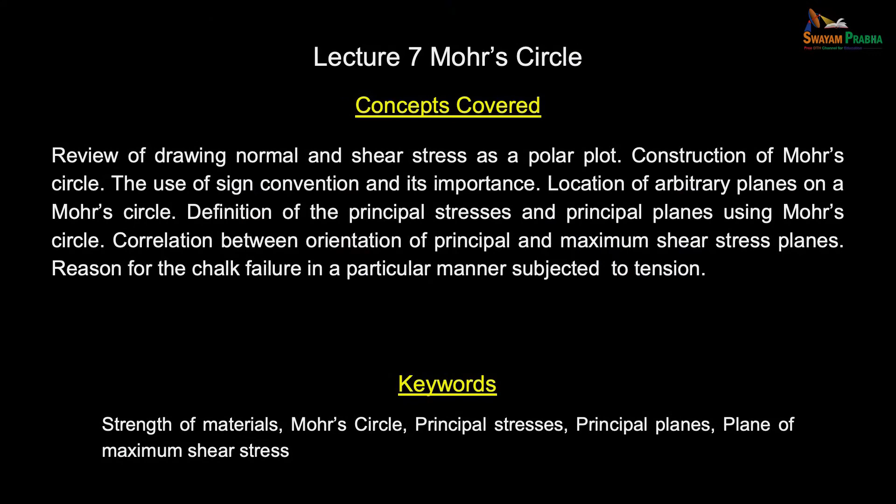We looked at stress in a simplistic manner as F by A. From there, we graduated to finding out what happens at a point of interest. We developed a new mathematical entity, the stress vector. Then we said we need stress vectors on all possible infinite planes passing through the point of interest, and we developed the concept of state of stress at a point. We looked at its pictorial representation, shown in 3 dimensions, then written for a planar situation, and then looked at its tensorial representation.

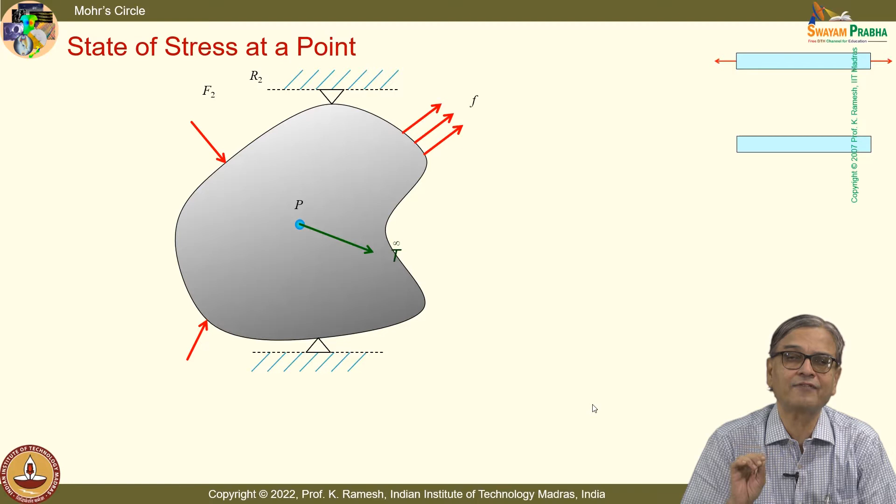I asked what are the possible ways of graphical representation. We saw one in the earlier class and will continue with that. When you say state of stress at a point, you show the stress vector like this - it is only a representation, I have not modified the size of the vector. Do not think every plane has a constant value; it is only a representation. Suppose I put all these points together, when I look at it I get an ellipsoid when viewed from the principal stress planes. We will postpone that for now. So the idea is there could be multiple graphical representations.

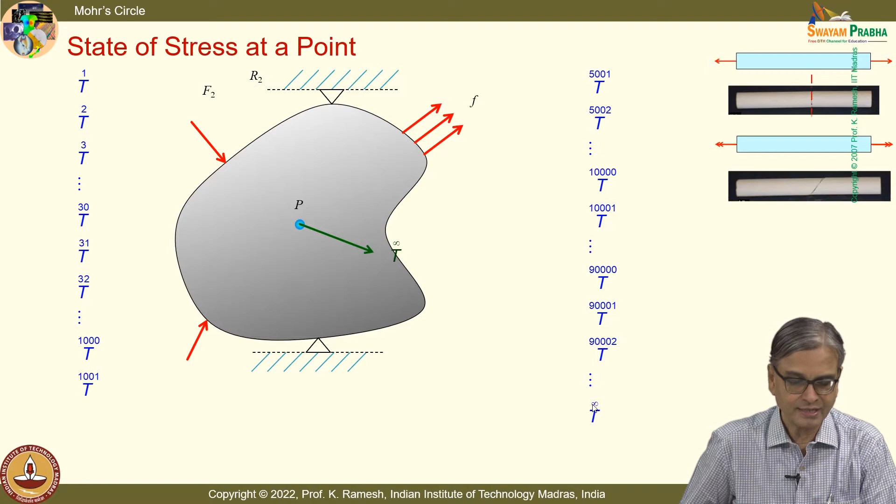We said that only if I have all the possible stress vectors passing through the point of interest do I get what is known as the state of stress at the point. And we also said this was looking unsurmountable, then Cauchy's formula rescued us.

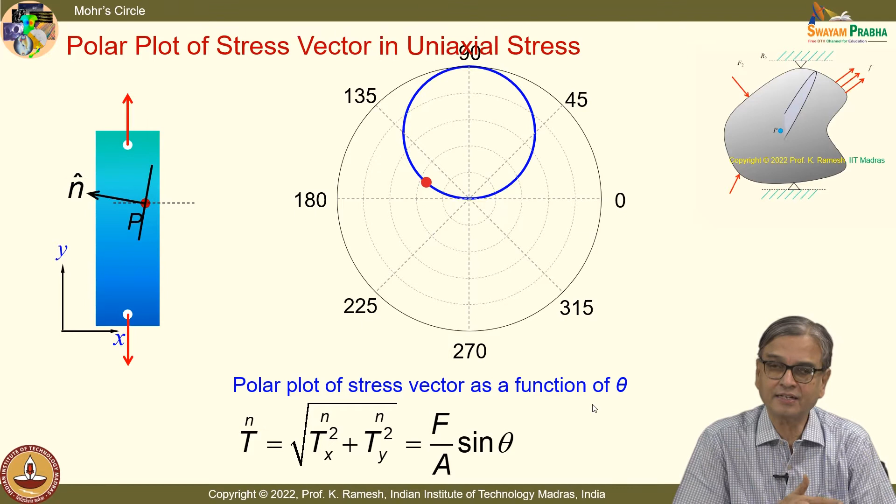You also have the stress vector represented as a polar plot. If a quantity is varying as a function of theta, the first step would be to plot it as a function of theta. That is natural, and if you look at any books, they do not spend time on this, but it is also very important. If you wanted to write a graphical representation, you would have started only like this.

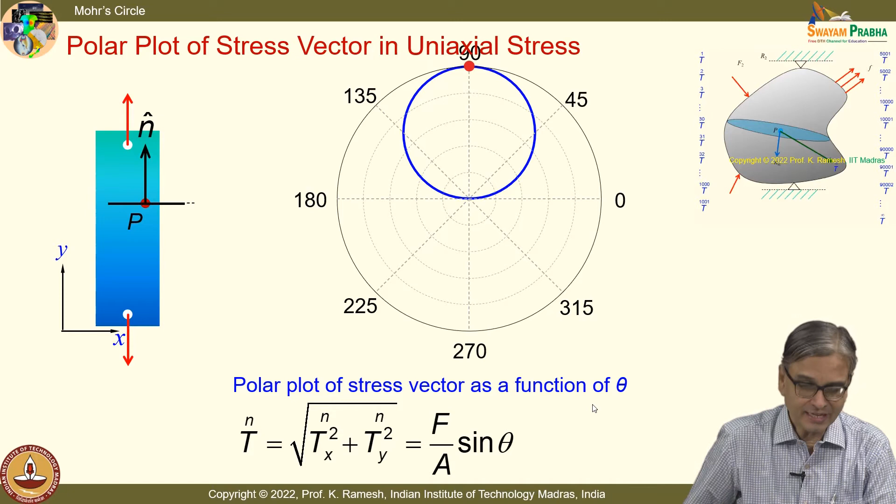Then we said the stress vector is not sufficient; we need to find out the normal and shear stress acting at the plane of interest. We have looked at that too. We have a stress vector that could be represented either as components along x, y, z directions, or components along the normal and tangential to the surface. In fact, while developing sigma xx, tau xy, tau xz, whatever shear stress is acting on the surface, we also resolved it into two additional components.

I suppose you understand that subtlety, because we have taken a plane passing through the x plane, so I could write the shear stress as components tau xy and tau xz. Here, when showing this, I am only showing on this plane what the shear stress is. So we felt that on each and every plane passing through the point of interest, it is desirable to know the normal stress as well as the shear stress, because this helps in predicting the failure theories.

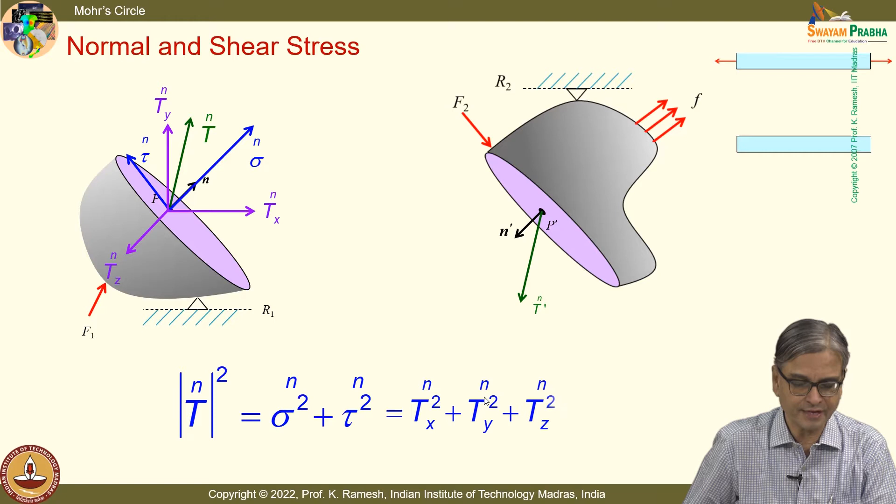So with this as a natural selection, we have looked at how this can be represented in these forms, and a natural selection is to go for a polar plot. I am also plotting this as a graphical representation, but as a function of load, plotting only one quantity. Photoelasticity also plots only one quantity, as a function of load, and you get this at every point in the model. This is one useful form of representation.

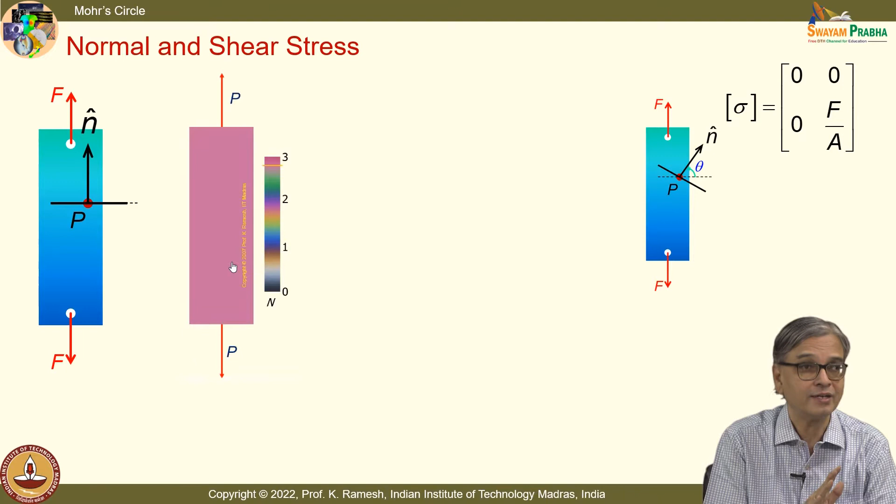At a given point, how do the normal stress and shear stress vary on each of the possible infinite planes? That is also important, so you have two different representations. This one is obtainable from an experiment, and it is useful because you know what happens in the neighborhood point - you get the advantage of a whole field of stress information. This is another representation of what happens at a point of interest.

For a given load, which we take as F, you get this as F by A. We discussed this too - F by A appears to be a scalar. All components, whether vectorial or tensorial, will appear only as numbers. I have said you should practice putting these as tensorial quantities. So in the case of simple uniaxial tension like this, you write the stress tensor in this fashion: 0, 0, 0, F by A. That practice you should also get - this is a tensorial quantity.

We have also plotted the shear stress, and it was looking very beautiful. I also made one more statement, and I don't know how many of you really appreciated it. We looked at the range of values of normal stress: it varies from 0 to F by A. And in the case of shear stress, it varies from 0 to F by 2A.

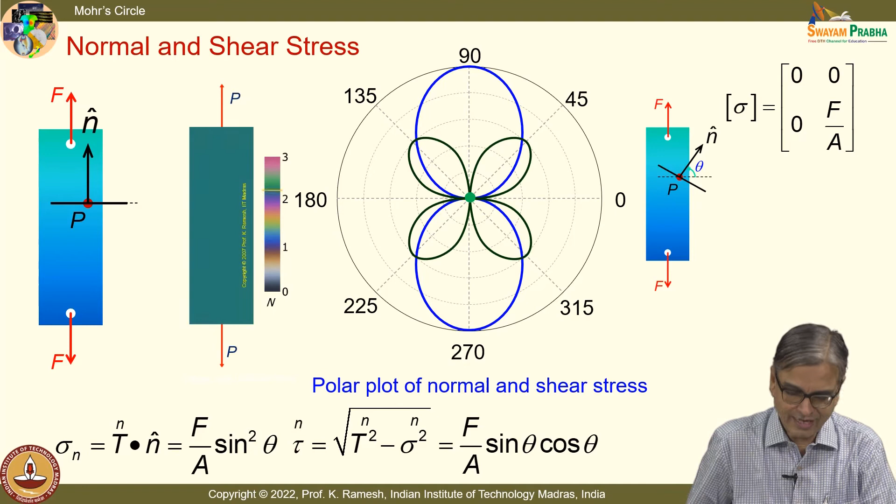Suppose this tensorial representation is populated, only the mathematics will tell you what kind of geometric pattern you are going to get. It may be very difficult to visualize and plot. Let us see what is the way that we would put it. And for this you will have to give credit to the scientists, since this has also taken sufficient time.

We had seen that in 1822, the stress tensor was identified by Cauchy. This form of representation - we want to know what is a normal stress and what is a shear stress. And I have already said, in engineering and science, what you plot on the x-axis and y-axis has really revolutionized the understanding of data.

When I go to this graphical representation, it also comes with an adjective that this is Mohr's circle. So even before you see what is the geometric pattern, you are going to get only a circle, and a circle is easy for you to draw. What I do is, on the x-axis I plot the normal stress, and on the y-axis I plot the shear stress.

This came about in 1882. It took about 60 years from the development of the stress tensor to this representation. What we are going to focus on in this lecture is the construction of it. If you want a mathematical proof, we will have to go back to the stress transformation, and we will do that in the next class. The Mohr circle representation is very elegant, and many of the concepts that you want to understand in stress analysis can be understood very easily by looking at the Mohr circle.

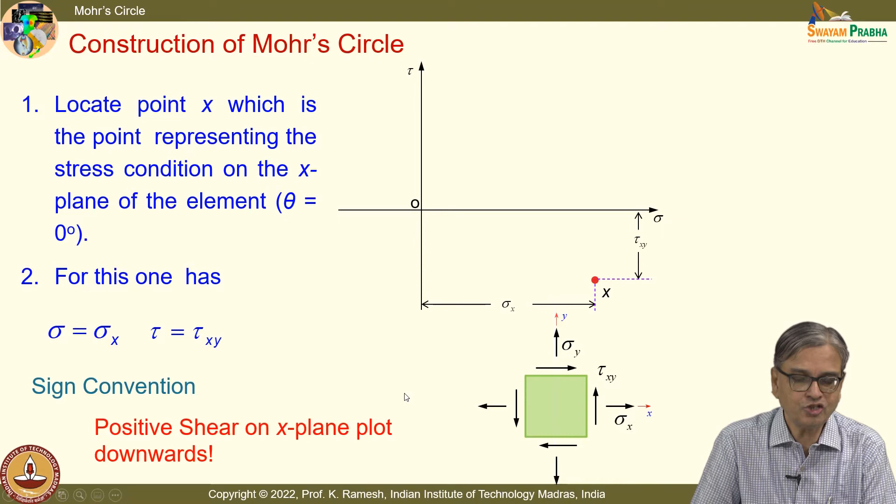From the pictorial representation, I have the information of what is sigma x and tau xy. I also have sigma y and tau xy. And what is the sign for sigma y and tau xy on the y plane? Both are positive. So the next job is to locate point y, and for point y we use the normal sign convention to plot.

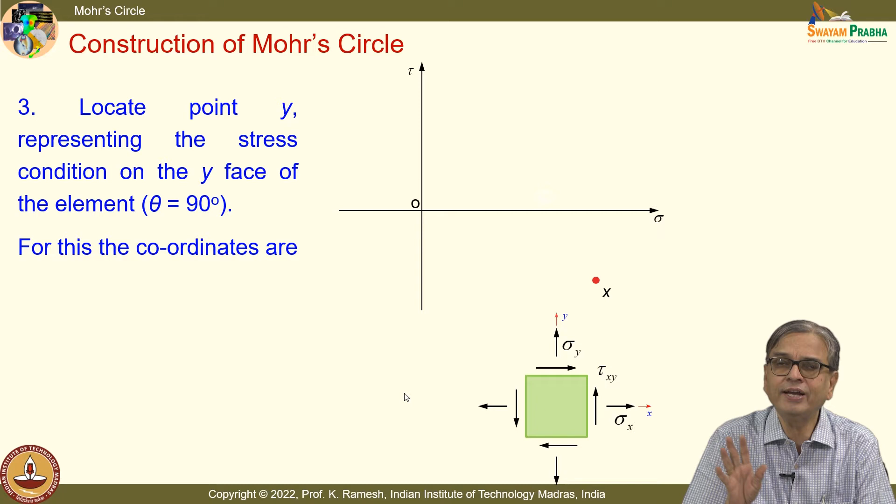I have the x axis, I have the y axis. I simply mark the point y. I have sigma equal to sigma y, so I have sigma y, and this is the line on which you can identify point y. Now I have tau xy, so this horizontal line meets and I get the point y.

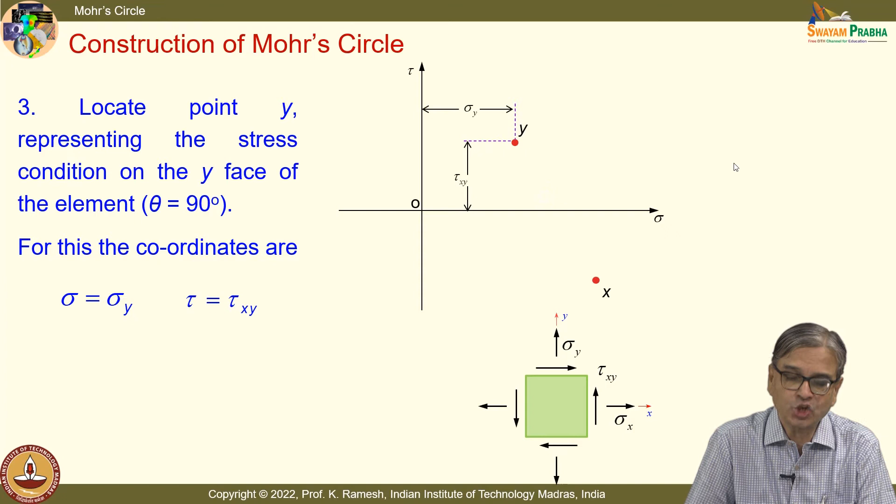And what you will have to know is that the points x and y are on a diameter that you do not know right now. So I join these two points to locate the center.

In those days you should appreciate they were not even having a calculator. Now you have a very powerful computer, and even the calculator does symbolic computations. All that has come. In the early 19th century they had only the slide rule, and most of the development was done being very comfortable in graphic representations. So the graphical representation has really helped the early development of science, in all disciplines. So you should give due credit for those graphical representations.

So now I have the center C, and I have already said that this forms a diameter. What strikes you directly? In a physical plane, x and y are separated by a certain angle, but in the Mohr circle, how are they represented? I have this angle doubled. Okay, so that is one observation, keep it in your mind.

Now I draw the circle with C as the center. You can also say what is the coordinate. One thing you can say is that, because it lies on this axis, the shear is 0. And what is the value of this? Suppose I have sigma x and sigma y, I can call this the average of that. We will see what the average is later. Keep it as sigma average and tau as 0. So we know the coordinates of C.

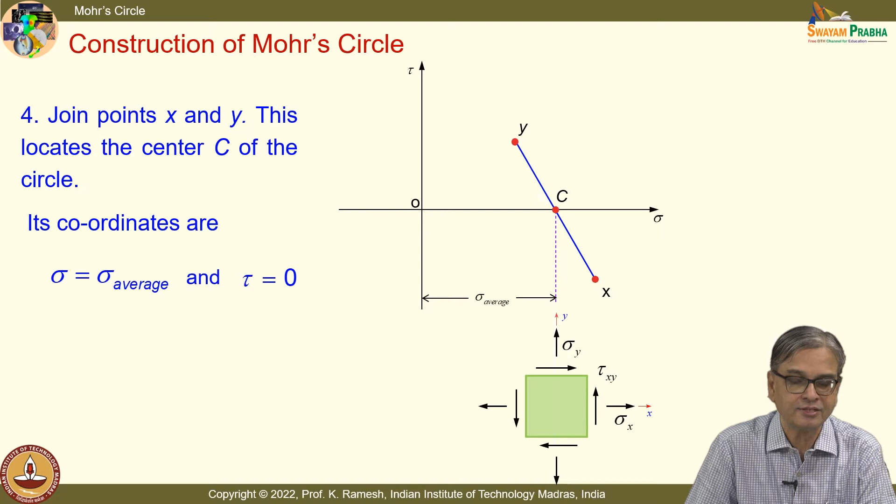I have taken up a generic problem. Do not confuse this with the polar plot we discussed for uniaxial stress. Does this circle belong to uniaxial stress? No. It is a generic problem because I have taken a generic state of stress: some sigma x, some tau xy, some sigma y. So both shear and normal stress exist. You learn for a generic case.

Later on, as an exercise, we can do it for a variety of cases. We have looked at uniaxial tension, we have looked at pure shear. Likewise, we can learn how these circles appear.

So what you have here, the graphical representation of the state of stress, that is what happens in infinite planes passing through the point of interest, is simply a circle no matter what the state of stress represented. The circle size may be different, the origin may be shifted, and the planes x and y may be relocated, but the geometric shape remains a circle. Don't you feel it is an advantage? It's a real breakthrough.

We will prove that it is a circle from a mathematical perspective. That we will see. Fine.

At this stage, we learn how to do the construction, because in the construction we follow a convention. Why do we follow a convention? That will become apparent when we see what happens in an arbitrary plane.

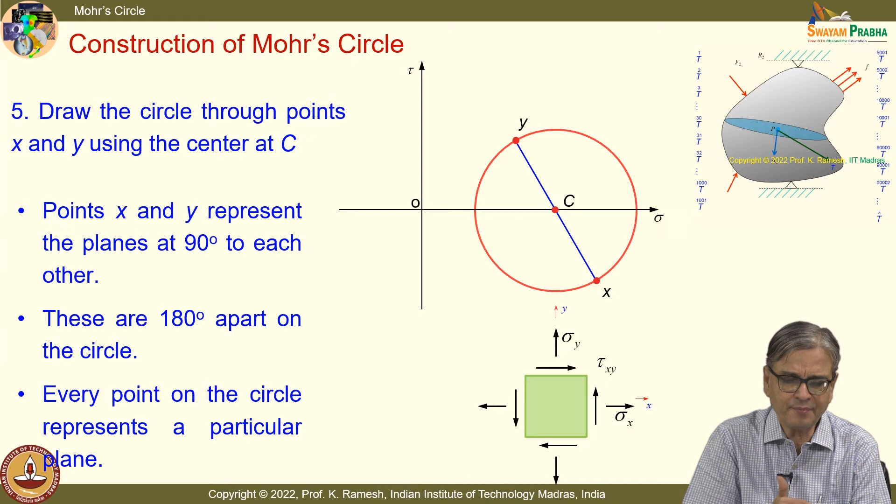And I go from x to y in the anticlockwise direction. I can go from x to y in the anticlockwise direction in the Mohr circle, provided I followed the convention. That will become apparent when we take an arbitrary plane.

We have done a stress transformation law from vectorial transformation to tensorial transformation. You have those expressions.

Now what we are going to do is, from the Mohr circle, we will find out if I have a plane oriented at angle theta from the x-axis, how will I get it?

I have to locate the point on this Mohr circle appropriately. Because once I have located the point, the magnitude of normal and shear stress are immediately known. They are nothing but the coordinates of that point.

So I have the stress tensor given, and then I want to find out what happens at a plane theta, and we have labeled that axis as x prime and y prime. In the earlier case also we had labeled it as x prime, y prime. What we determined was, we determined t x prime, you have to interpret that as sigma x prime x prime. So I was cautioning you, it is not like a vectorial transformation, it is slightly more than that because you have two subscripts.

Now the x prime plane is separated by angle theta. How do I locate the plane in the Mohr circle? From whatever discussion we have had, can you say how do I do it, because I know where the location of the x plane on the Mohr circle is. Now I have to locate the x prime plane. How do I do it?

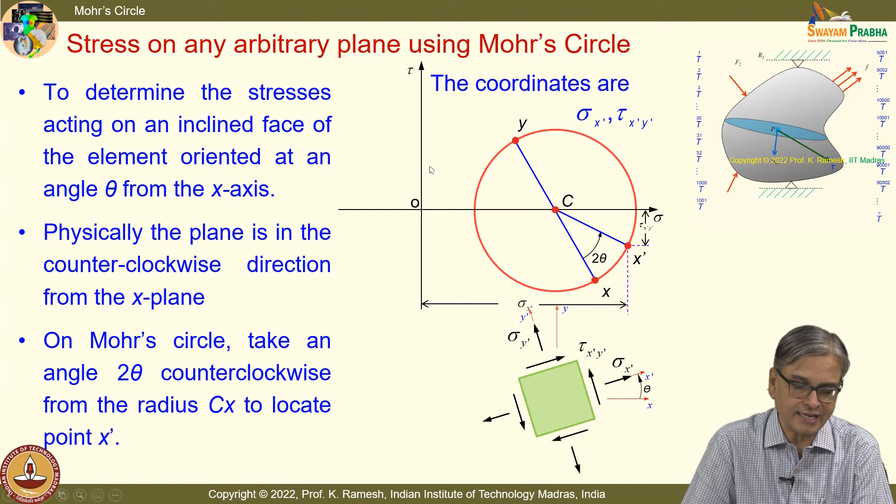So the coordinates are sigma x prime and tau x prime y prime. I have already said we will interchangeably call it sigma x prime, because when you put the symbol sigma, it is understood to be normal stress. So it's automatically understood, and we take the liberty to call it like that.

How do I locate the y prime plane? We have already seen that x and y are separated by 180 degrees. On similar fashion, x prime and y prime are separated by 180 degrees. I simply extend the radius to the diameter, so I locate the point y prime, and I can read what is sigma y prime and tau x prime y prime from this diagram. It is as simple as that.

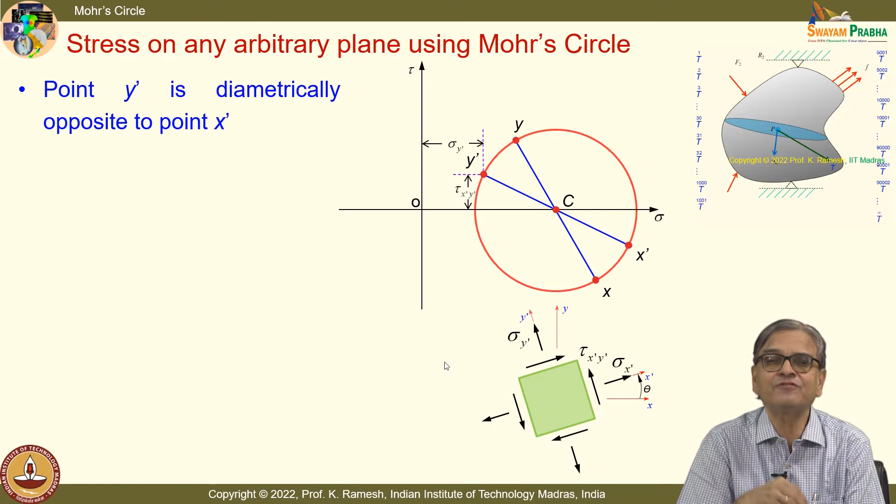Many times we may not make the calculation from the Mohr circle, but we may want to find out the sense from the Mohr circle. We will also see how that can be used - the sense of rotation from the Mohr circle.

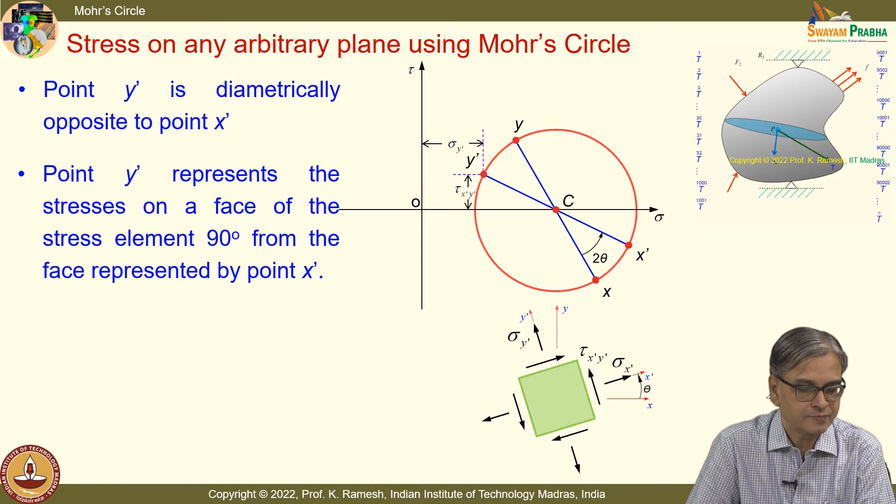So point y prime gives the stresses on the y face. They are nothing but sigma y prime and tau x prime y prime. So stress transformation is simple and straightforward. There is no difficulty at all.

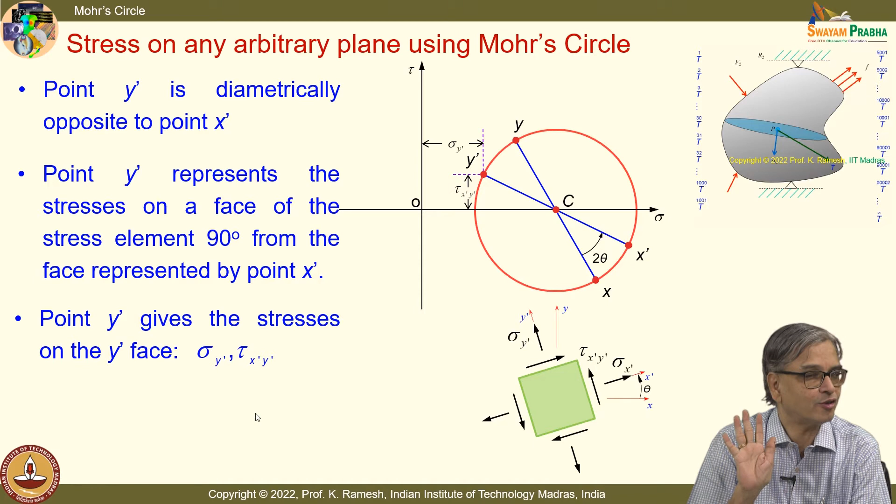This is emphasized, that it is moving by the angle 2 theta. And by looking at this circle, can you identify certain interesting planes which was difficult to find out when I had the polar plot? Only when you look at it very intently will you be in a position to identify.

I can easily see the circle cuts the x-axis, which is nothing but the sigma axis, at two points. What is the implication of that? On those planes, I have only normal stress. We have already said something very special: whenever I look at any stress state and draw a circle with sigma and tau, it will always cut that horizontal axis. So I am always going to have planes on which only normal stress exists. They are very special - they are called principal planes.

There is also another information you can gather. I have this as the maximum value of shear stress. When I have the maximum value of shear stress, in general you will always have a normal stress too. That's what we had seen in the polar plot also. That is very clear here.

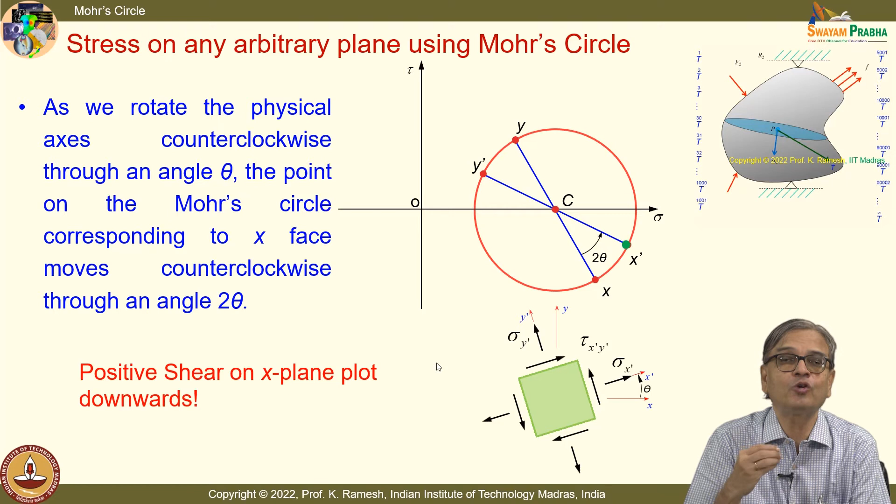For me to do this anti-clockwise rotation theta and anti-clockwise rotation 2 theta, it is possible only when I follow the sign convention. If I don't follow the sign convention, I lose that advantage. So if I am going to have an advantage, it is better to follow a convention.

We are in a society where people, if they break the convention, think that they are more close to people - it's not so. In science and engineering, you will have to follow the convention because it has its definite role to play, isn't it? Now, celebrities break conventions and their fans are very happy. That doesn't work in engineering - you have to follow the convention.

Now we will find out the principal stresses. By definition, principal planes are those planes where the stress state is such that on that plane you have only a normal stress. A priori, you do not know at what angle with respect to the x-axis you have the principal plane. So this is one of the quantities you have to find out in a physical problem.

The second aspect is, what is the magnitude of the stress? I need to know the magnitude and the orientation of the principal plane. All that can be easily gathered from the Mohr circle.

Instead of telling this as an arbitrary plane, now we have fixed it: find out a plane on which you have only normal stress. The same question I raised when we had Cauchy's formula, where Tnx, Tny multiplied equal to your stress tensor multiplied by direction cosine. I said two classes of problems can be formed. In one class, you are given the direction cosines, find out what is the stress vector. In another class, find out the direction cosines if you dictate what should be the nature of the stress vector.

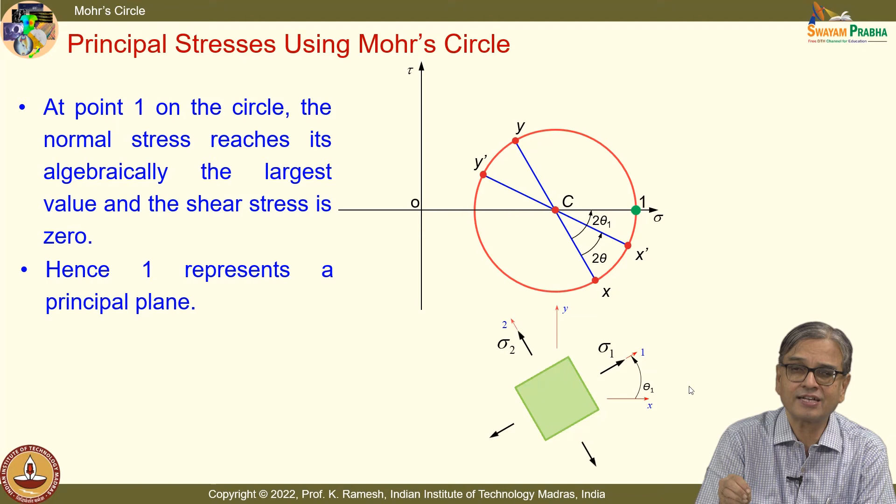When I say sigma 1, at a given point of interest, if I have multiple normal stresses, I can have, in a 3-dimensional problem, 3 principal planes. Of these, the algebraically largest I will call sigma 1, the next algebraically largest as sigma 2, and the least value as sigma 3. So this is a convention that is also used.

So the other principal plane you can represent by point 2, and this is separated by an angle of 180 from principal plane 1, and I have this as sigma 1 and sigma 2. I have this angle as 2 theta 1. From the diagram I can also write mathematical expressions for the magnitudes of these stresses and their orientation. I can do that, we will also do that.

So to summarize, I have a Mohr circle where the arbitrary plane is represented and also the principal planes are represented, and I want to find out the magnitude of this from the Mohr circle. Suppose I want to find the value of sigma 1, how will you write it? I have to know the distance OC and the distance C1. Can you find out what is the distance OC?

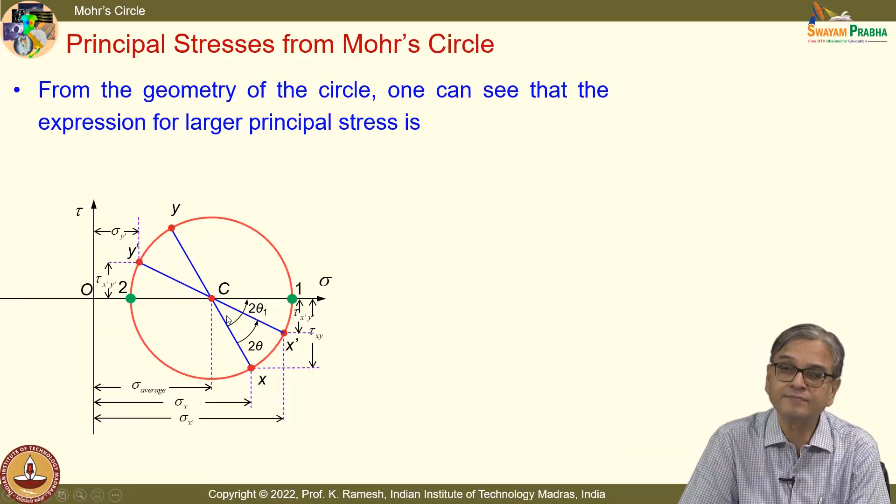We have written that as sigma average, which is nothing but sigma x plus sigma y by 2, and your C1 is your radius r. From the Mohr circle we are also in a position to write expressions to find these quantities mathematically. And what is the value of r? Because we know only the stress tensor at the point, given with respect to the reference axes x and y, which we call sigma x, tau xy and sigma y.

Can I find out the expression for radius r? You can easily work it out, because we know the coordinates for x and y. From these you can easily find an expression for the radius. Please work it out and then check it against my slide. It is not very difficult, it is very simple - a simple property of the circle is what you will have to use.

So I can get the expression for r as simply the square root of sigma x minus sigma y by 2, whole square, plus tau xy whole square. And whenever I have a square root, when I want to find sigma 1 or sigma 2, I will have this as plus or minus. Sigma 1 is represented this way with a plus sign, and sigma 2 will have a minus sign here. So I can find out sigma 1 as well as sigma 2 from the Mohr circle.

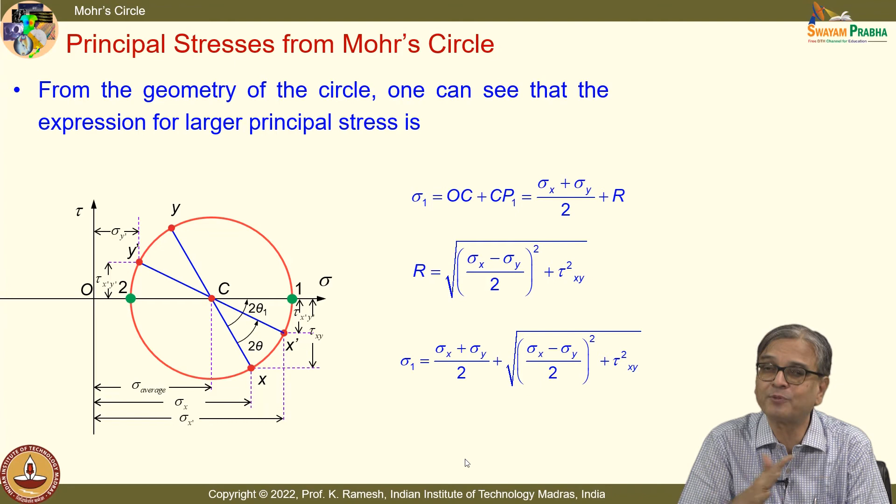So this is what I had discussed. I have now put the expressions here, and I can use this as the basis to find out how to get the principal stress direction comfortably from your Mohr circle.

Even when you solve it mathematically, you will have to use the multi-valued function. Many times when you take the square root, you don't take plus or minus; you always assume it as plus. You agree with me, because many times you get the correct result with plus, so you haven't even gone and checked.

Like I said, when you have multiple interconnected rigid bodies, if you want to apply the equilibrium condition, you should ideally apply it to the system as a whole as well as all the subsystems, which I emphasized when I developed the engineering mechanics course. But many times people simply assume that if you satisfy f equal to 0, m equal to 0 for the entire system once, the solution is correct. I had a counter example showing that your mathematics should help.

Idealizations are very important in engineering. If you don't do the correct idealization of the support, if you do not check f equal to 0, m equal to 0 for the subsystem, it will show up. So you have to go back and improve the idealization.

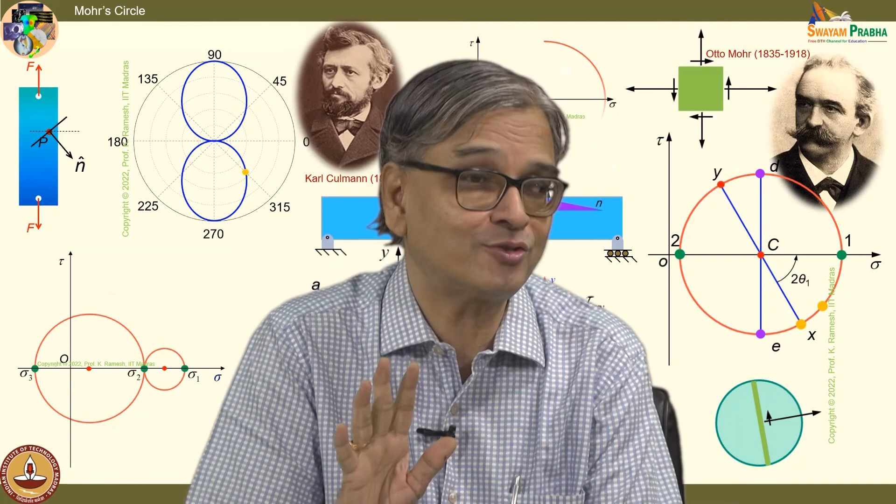So do not violate this. Once you start practicing engineering, it is not the quickness with which you solve the problem that retains you as an engineer; the correctness with which you solve the problem is very important. So you should have checks and balances, which we will also see when we want to do stress transformation. There are certain invariants that we will use to verify whether the result obtained is correct.

That inbuilt checking approach is needed for engineering. Otherwise, when you build a bridge, it will collapse. I was told they had built a bridge in Andhra Pradesh without putting steel. What to do? The contractors who fund those projects want to maximize their profits. And if you build a bridge without reinforcement, how will it withstand? It cannot withstand at all.

That came up for retrofitting in our civil engineering department. Those professors were communicating it: if not IIT, which institution can salvage this kind of situation? So they have to put extra supports and make sure the bridge at least lasts for the minimum service life. So you have to have inbuilt checks in all these aspects of calculation. It's not speed.

Okay, so forget about your JEE training where you were all told speed is very important. Speed is not important in practicing engineers. Correctness is important. So I get theta 1 from this, and theta 2 is theta 1 plus 90, which is very clear from Mohr circle.

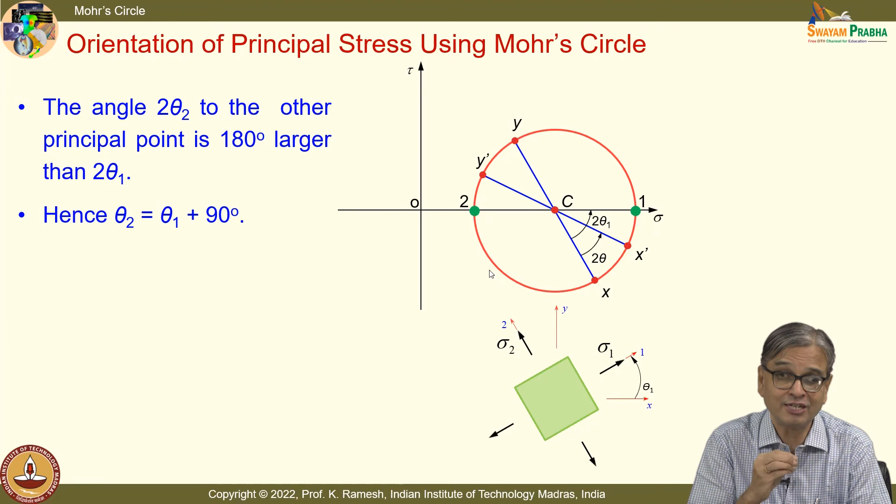And many times people have not attached what is the angle that they have got to the relevant principal stress. That is also very important. That you can easily do when you have the Mohr circle. And we have said that you also have a maximum shear stress.

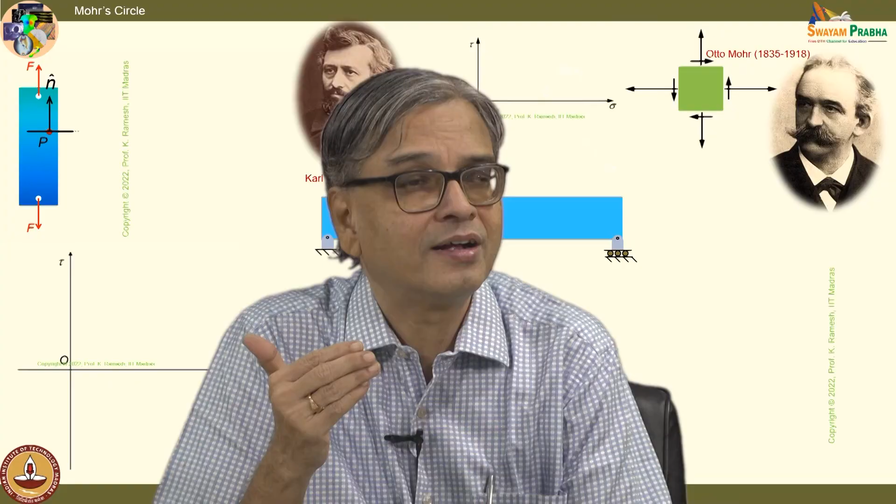Can you tell me what is the orientation of the maximum shear stress in the physical plane? 45 degrees to principal stress plane. Fine, so you understand. Now can you go back and think? Something happened to chalk. We were telling 45 degrees, isn't it?

So 45 degree was not arbitrary. There is some meaning attached to it. So you should know what kind of stress state is introduced when I apply torsion. When I apply torsion, what happens? You should know, and you should also know what causes a chalk to failure.

Suppose I say chalk fails by normal stress exceeding a limit. Then you can explain what happened when you pulled, what happened when you twisted.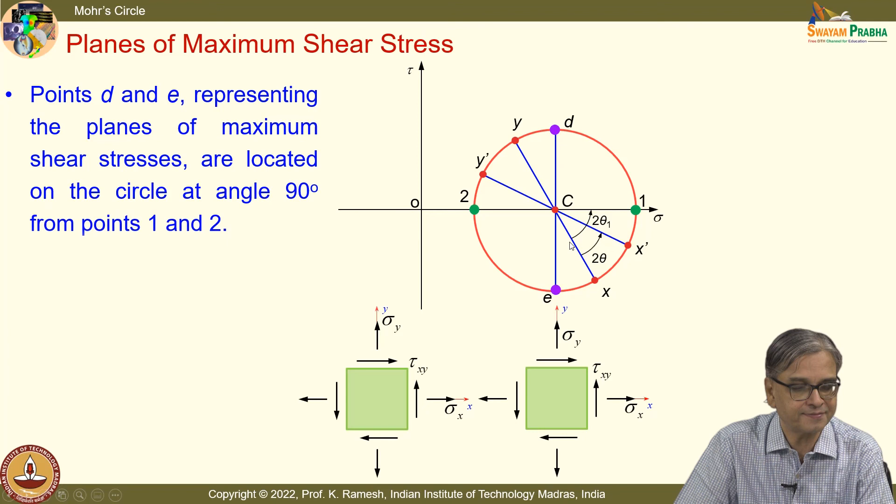So here it is at 45 degrees. You have correctly identified in the physical plane. In the Mohr circle, it is at 90 degrees. So you have the points D and E representing the planes of maximum shear stress.

And you will have to recognize maximum shear stress plane always has some amount of normal stress in general. I can also have in special situation when the center is shifted to the origin, I will have on the maximum shear stress plane only shear stress. I will not have normal stress. Okay, but in general, only when you have normal stress, you can identify either 2 planes in 2 dimensions or 3 planes in 3 dimensions where the stress is wholly normal.

So they are very important. Okay. So I have this at 90 degrees. So on the physical plane, you can identify from the principal stress plane, they are oriented at 45 degrees.

So now you can appreciate, instead of looking at what happens as state of stress at a point of interest, if you look at from principal planes as the reference, your matrix also becomes very simple to write, and you also find out what is shear.

Even before we go into theories of failure, experiments have revealed brittle materials fail by maximum normal stress and ductile materials fail by shear stress. So that is the reason why we attach more importance to finding out at a given plane of interest what is the normal stress as well as the shear stress. Okay, that is the reason why we pay attention.

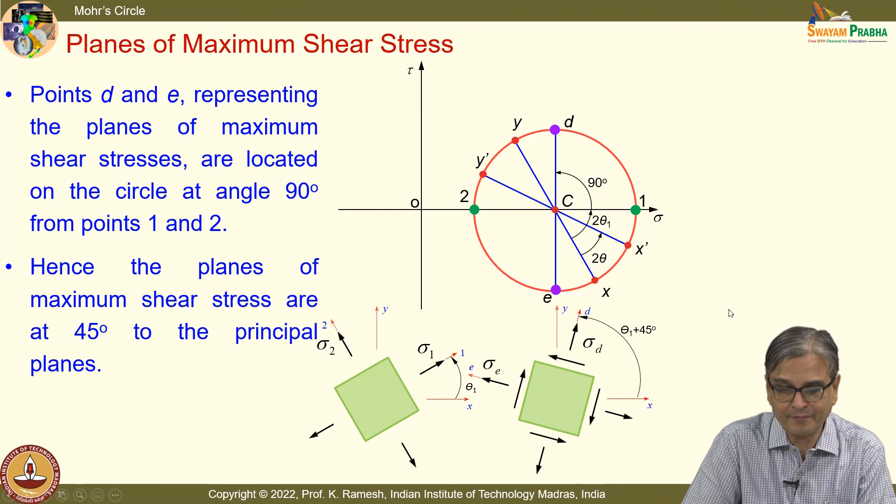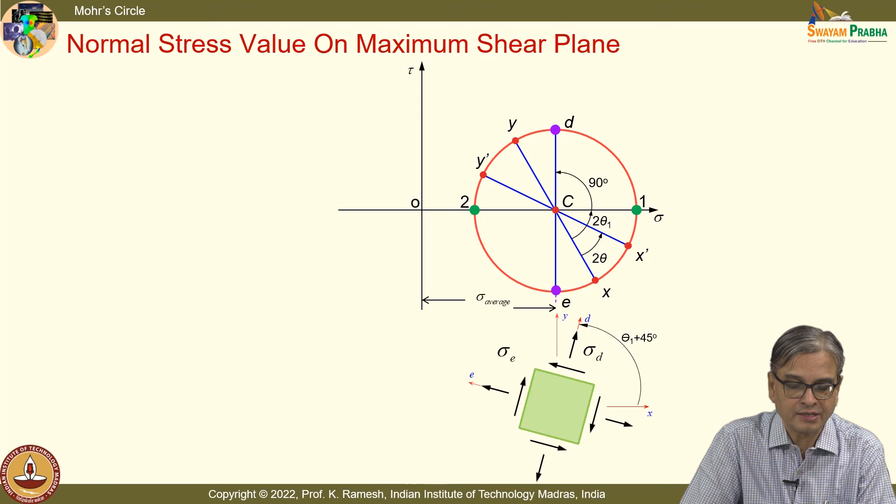Fine. At a given point, you always want to know what are the principal stresses and what are the maximum shear stress, how they are located, the magnitude of the maximum shear stress as well as its location. So I have this normal stress is nothing but sigma average, okay, and this is what you have. So I have shear stress as well as the normal stress acting on those planes.

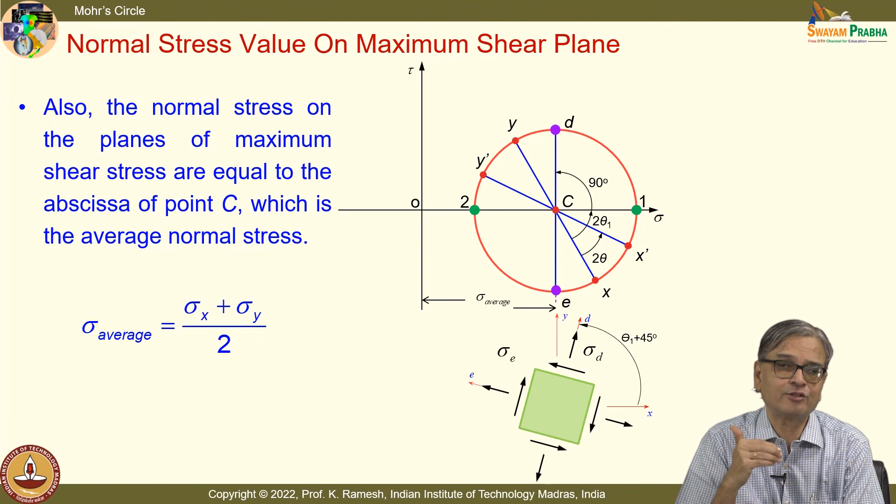So in this lecture, we have looked at a very powerful graphical representation that goes with the name of Mohr circle. The scientist who determined is Otto Mohr, and I said that this was determined in 1882, 60 years later than stress tensor was determined. So some of these quantities take such a long time to develop.

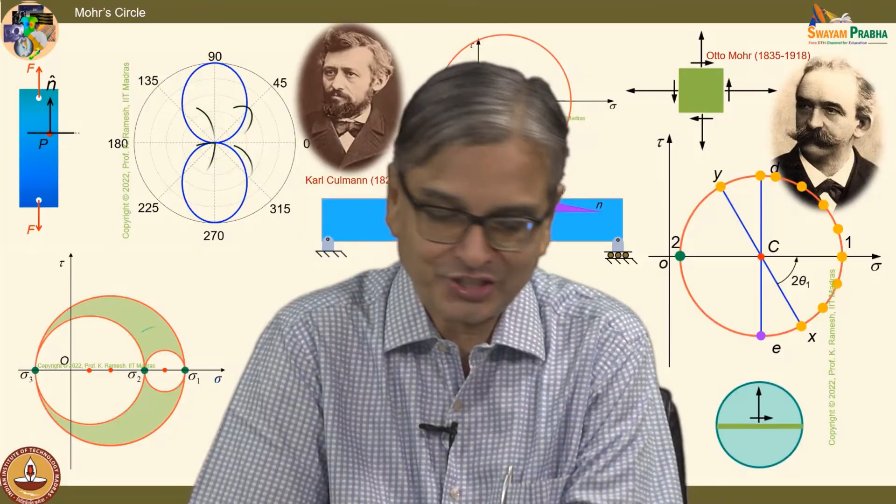We study them in 15 minutes in a class. One class to the next class, we travel by 100 years. Fine? So that is the way the learning goes. Thank you very much.